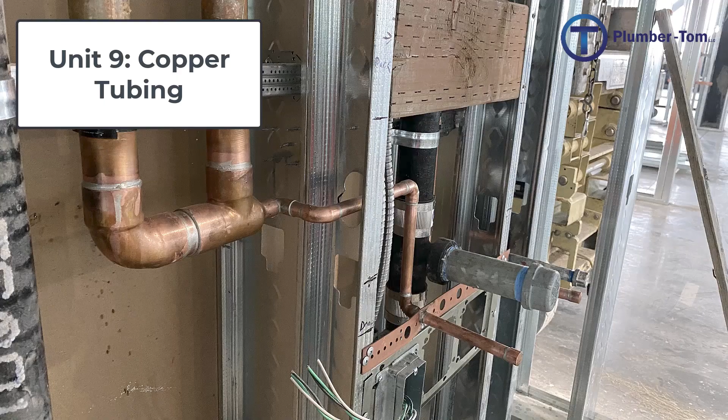Well, the answer to this question of what drives the change is it's the cost, mainly, right? Cost and availability. Early on when we had steel, there came up a need for steel in other ways. Steel was used to make different war machines during World War II and during other wars following. And there were other uses for steel, so they found an alternative. Copper is actually a really good pipe when it comes to holding water for a long period of time. So they started using it.

But copper is also useful for many other things, and it is a limited commodity, so they have developed other ways of distributing water, namely PEX or other plastic. We see this on the drainage side as well. It used to be cast iron, and then it moved into ABS and PVC plastics. So this replacement of metals with plastic mainly had to do with the cost and the availability of materials.

And I want you to understand that because you may come into this trade and learn a certain method and material, right? You're learning on PEX, you're gluing together PVC, but keep an open mind. There may be in the future other methods and other materials that emerge because it's a constantly changing thing.

Don't get so set in a certain way that you become like plumbers that I'm aware of who wouldn't get past copper. They wouldn't use PEX. And it drove them out of the market because they could not compete with those that were using PEX and could do the work faster and cheaper. So again, my advice to you is stay up with the times. Follow the changes. Learn the new methods and the new materials.

Back to copper though. Let's look at some of the uses of copper. In the book they mention specifically that copper is largely used for water lines, but it is also used in drainage, or maybe I should say was used. There are a few commercial applications that still use copper for drainage, and when you're in those situations, the plans will spec that out and it'll say, here's what you have to use, copper. But any other plumbing situation, you're not going to be using copper on drains because it is so expensive.

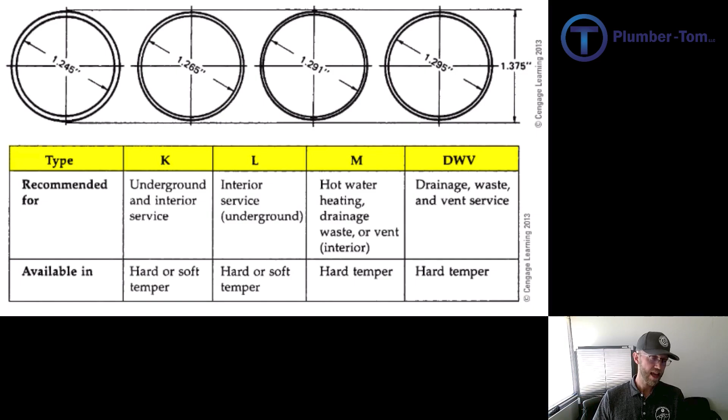As we examine copper, it is important to understand that there are different types of copper, and that's how we say it in the plumbing trade. It's a type. There are types K, L, M, and DWV. You can see from this illustration in the book, we're looking at a 1.25 inch pipe, nominal pipe size. Again, nominal meaning you're looking at the cutaway, you're looking at the inside diameter.

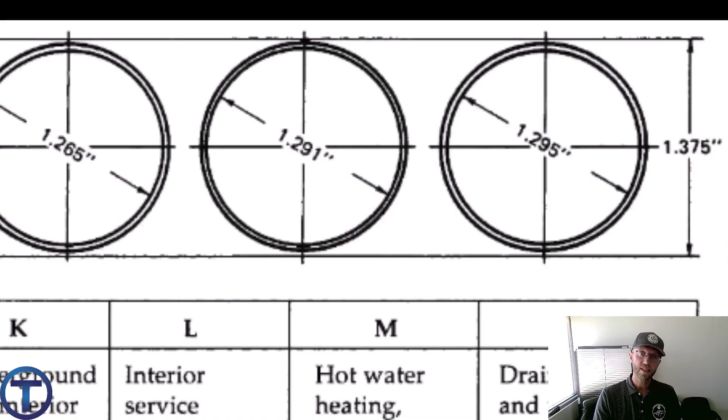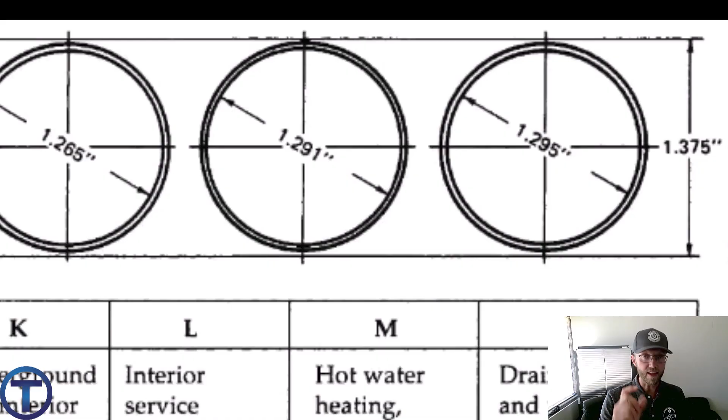Examine this closely, and what do you discover? Once again, the outside diameter of all of these pipes, all of these types of copper pipe, are the same, 1.375. But the difference between these pipes is the inside diameter. If it has a smaller inside diameter, that means it has a thicker wall. Now, why would you want a thinner or thicker wall when you're dealing with copper pipe?

Well, if you're trying to go cheap or save some money, a thinner wall is going to be less expensive. So we see that on these other types where we have DWV or M. These have a much larger inside diameter, which creates a thinner wall, which means the pipe is going to cost less. L and K are going to get thicker and thicker. So why would you use one or the other?

Well, this table helps us out with the understanding there. It gives us the type and then recommended for. Type K is recommended for underground or interior service. We're talking the main line, right? Coming from the street to the building. Type K is very often used by plumbers in the soft copper variety. Soft copper comes in rolls, 100 feet or so.

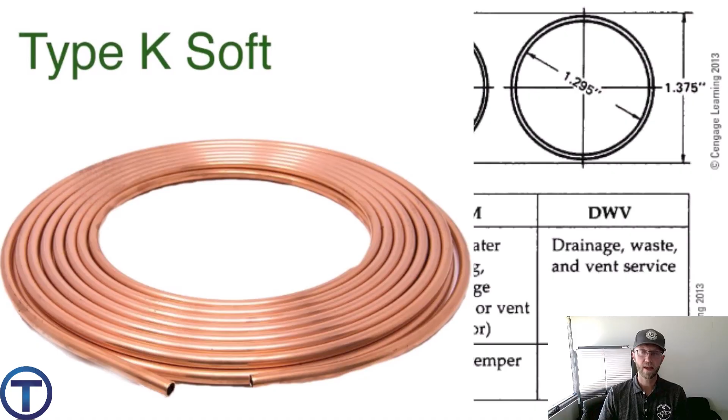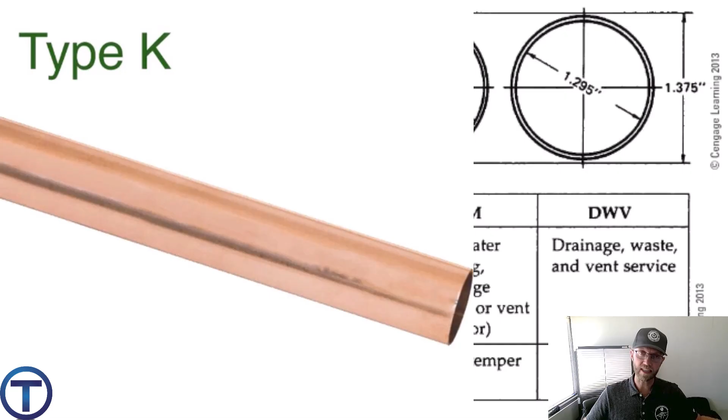These rolls are soft enough that you can just roll it right out. The opposite of soft copper, of course, is hard copper. This is more tempered, it's more rigid. This is what we buy in 20-foot lengths, and it's a stick. You know, you're not going to be able to bend that thing without destroying it.

But again, for type K, most of the time, we're looking at rolls. We're using it on main lines. We're using it underground. Type L is most often used inside of commercial buildings. It has a good, solid, thick wall. Most of the time we buy that in the hard copper, so it comes in the sticks, we cut it up, we solder on the fittings.

Type M is used for hot water heating. That means radiant or recirculating hydronic systems, drainage, waste, and vent. Over time, type M has also been used as water lines in residential. I don't know if it's specifically rated for that, but in general, as people try and build residential as cheap as possible, they have been installing type M copper in residential applications.

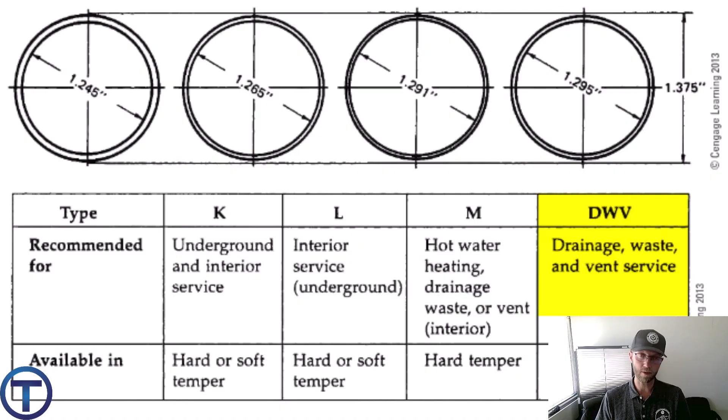And then finally, DWV stands for drainage, waste, and vent. Drainage, waste, and vent piping. I mean, these are larger copper sizes. You have to understand one of the differences with copper drainage, waste, and vent is not only we have a thinner wall on the pipe, but we have a difference on the fitting.

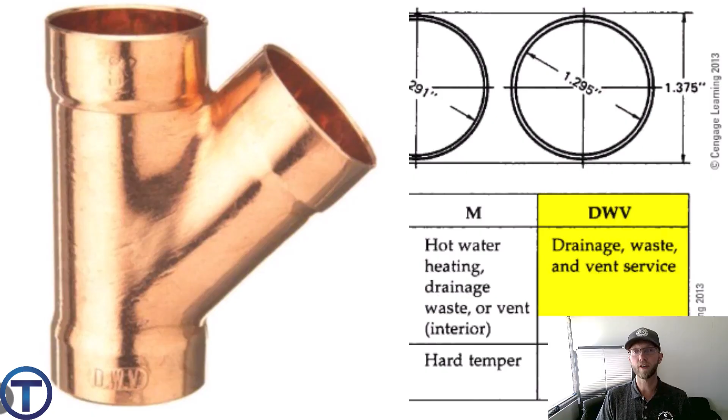Now, copper fittings have a socket, and the copper slides into the socket and you solder that in place. The socket on a drainage fitting is not as deep as a water type fitting. So that's the main difference we see with drainage fittings. Once again, very unusual that you are even going to see copper drainage pipe.

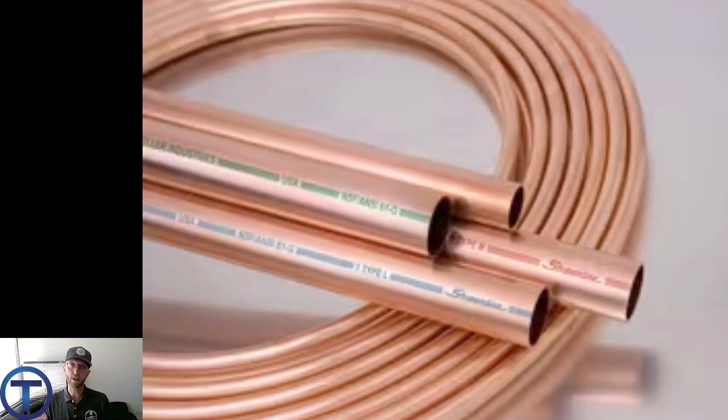As a plumber, it is important that you are able to identify the difference in these types of pipe. And to help us along, they have come up with a color code for each of these 4 types. You can look for the color on the side of the pipe. It's going to be the printing, the printed words, all of that information given, which would include the size of the pipe and the type. It says it right on it.

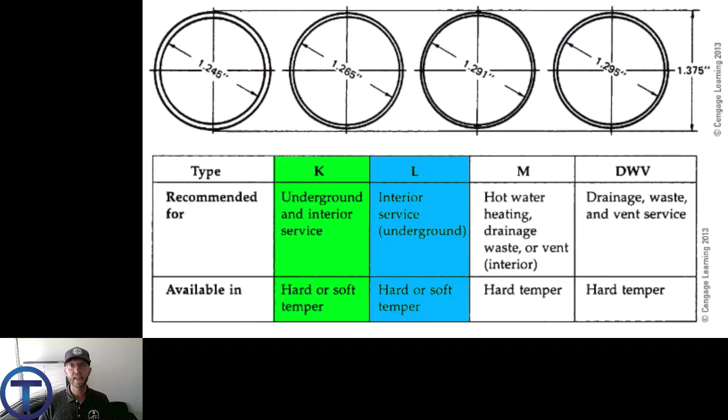But the color gives us a quick reference, so we don't even have to get in and look at the words, or worse, try and measure the inside diameter or something. It's color coded, okay? So let's go through the color code. The color for type K, it's going to be printed right on the side, is green. The color for type L is going to be blue or sometimes black. The color for type M is red. And the color for type DWV is yellow.

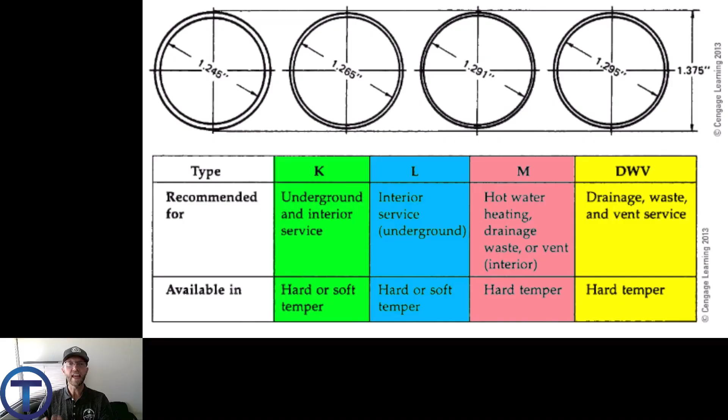Once again, you're going to look right on the side of the pipe. You should be able to see that color. And it's important that you're able to do that, because there is a very big difference in the cost of these types of pipe, as we mentioned before, because of the wall thickness. So if you are supposed to use a type L copper on a job, but you grab a type M, well, you're not going to have a thick enough wall, and it's not going to meet the building specifications.

On the other hand, if you're doing a hydronic system and you could use type M, but you grab type L, it's going to cost you way more than it needed to, because you bought the more expensive, thicker wall pipe. So you have to be able to identify this.

Okay, all that said, let's jump into the sample problem. It says compute the wall thickness for K-type tube of 1 1/4 diameter. Refer to data table number 4 in the appendix. So we're going to figure out what is the wall thickness. Turns out they have all of those same dimensions on the diagram we just looked at, so you don't necessarily have to go to data table 4 for the sample problem, but you may for some of the other exercises, so keep that in mind.

Let's take this step by step then. Step 1, determine the outside diameter. We look that up. It says 1.375, that's the outside of the pipe. Step 2, determine the inside diameter. We're dealing with type K, and this is 1.25 inch pipe. So we look that up and it says inside diameter is 1.245 inches.

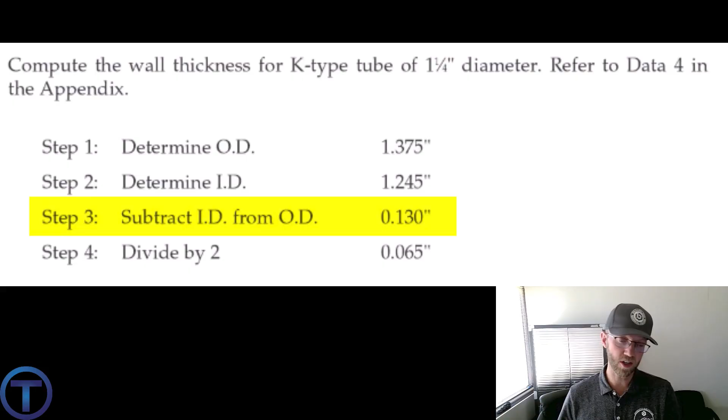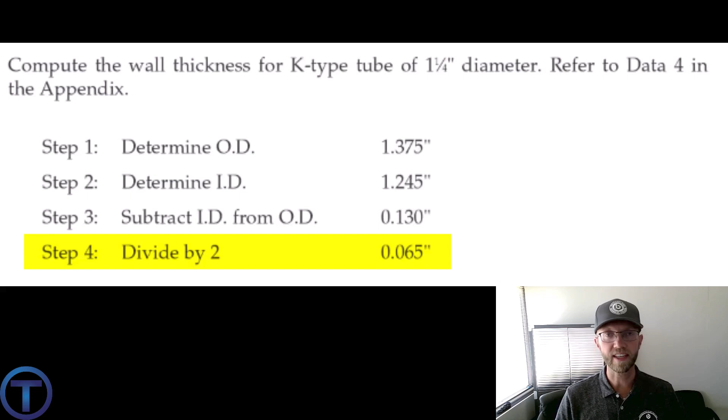If we subtract the inside diameter from the outside diameter, we're going to get 0.13. But because that represents both sides, we're looking all the way across the diameter, we need to divide that by 2. So step 4, we divide by 2 and we get 0.065 inches is the wall thickness of type K for 1.25 pipe.

With that, I will turn you loose on your exercise problems. There are 6 questions based on this short unit. You can look back over the reading if you are looking for answers, or it will also have you do a few calculations like we just did. Hopefully this helps you to understand the different types of copper. Please take the time to memorize the different types and the colors. It will help you in your career.